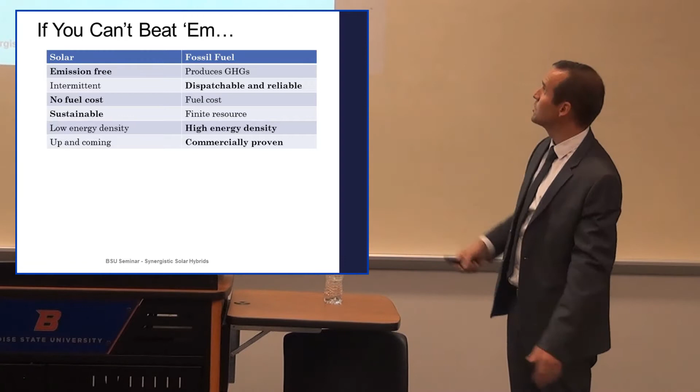So solar has no fuel cost, whereas with fossil fuels you actually have to put a lot of work into getting that fuel out of the ground and into the right state to put it into a power plant. Solar energy is sustainable, so as long as the sun is shining we're going to have this great resource, whereas fossil fuel, depending on who you talk to, one day is going to run out. It might be several hundred years from now, but one day we're going to have to get off of fossil fuel. Solar's big disadvantage is it has a really low energy density, so despite all this sunlight hitting the earth, actually harvesting it requires a whole lot of land area. Fossil fuels—it's pretty remarkable how far a gallon of gas will get you and your couple-ton vehicle.

Solar is kind of an up-and-coming technology. We still haven't worked out all the kinks and bugs with the best way to get it on the grid. At small scale it's okay because it doesn't have that big of an impact, but when you start thinking about really high penetrations of solar and wind, we don't have the technology or the controls figured out to make this whole system operate in a robust way. That's what I consider to be a very important area of research.

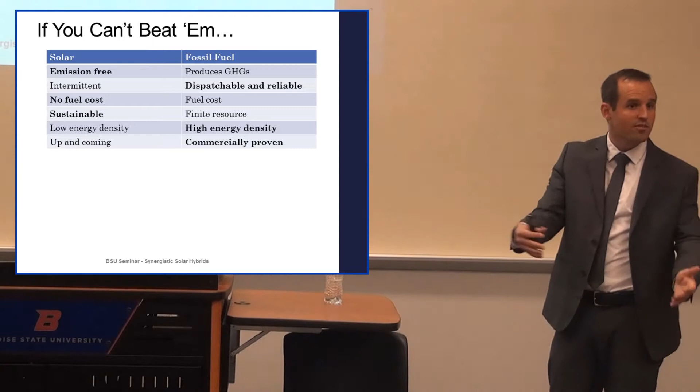My research focuses on trying to forecast what's coming in the future and use that to inform how I run my system for the next several hours or several days so that it stays reliable and efficient. Whereas fossil fuels are definitely commercially proven—we've been relying on them for over 100 years now in pretty complex ways.

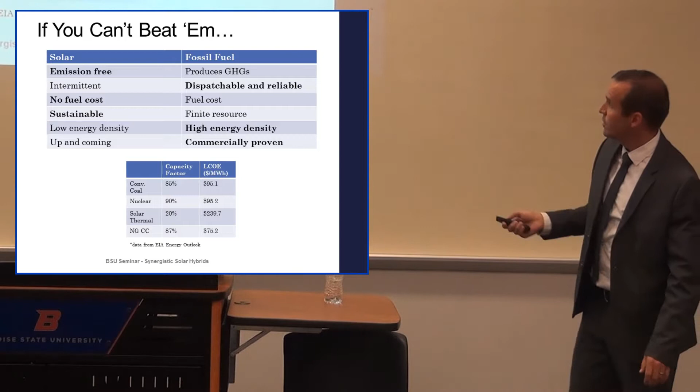I'm showing here some data from the EIA, the Energy Information Administration. This is their energy outlook—I think it's now a couple of years old—but they're showing several different electricity producing technologies: conventional coal, nuclear, solar thermal, and natural gas combined cycle.

They have more than this, but I picked and chose the ones I wanted to highlight. This is their capacity factor—basically, you build a plant to produce 100 megawatts, what percentage of that over time do you actually produce? Solar thermal is only at 20% because even though you build a plant that produces 100 megawatts, you may only average 20 megawatts, since at nighttime or if there's clouds, you don't produce anything. So that capacity factor is a big issue.

This other metric is the levelized cost of electricity. This is a term that lumps all the different costs associated with producing electricity into one number. It takes into account the capital costs of the plant—so while solar energy may be free, you still have to make a big investment to put those panels on your roof or build a power plant to harvest solar energy. It takes into account all those costs and annualizes them, plus fuel cost and the cost to pay people to run your power plant.

You'll notice solar thermal definitely sticks out like a sore thumb compared to these other dispatchable technologies—technologies where you can just start a reaction or burn a fuel and it's available on demand. The LCOE for solar thermal is $240 per megawatt hour. So as much as you might love solar, you probably don't want to pay that much to turn on your TV or lights. You'd much rather pay the natural gas combined cycle cost of $75.

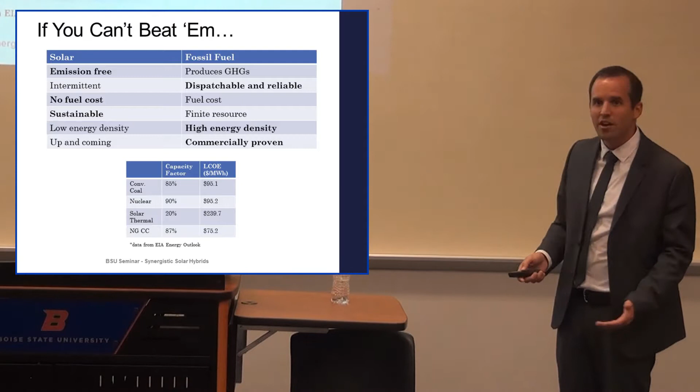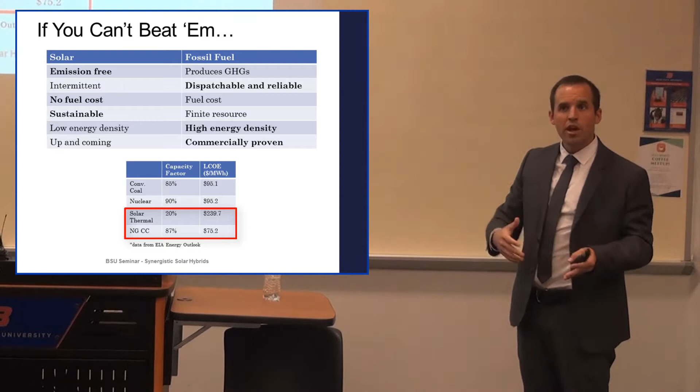So the objective of this research, and one of the central hypotheses of what I'm trying to do, is: if we combined these two and tried to pick and choose some of the benefits of each, merging them in a way that's smart from a design point of view, and operating the plant in a way that's smart from an operational point of view, we hope to drive down the cost of solar thermal power so it's much more like natural gas combined cycle or natural gas fired power generation. That's what's motivating this.

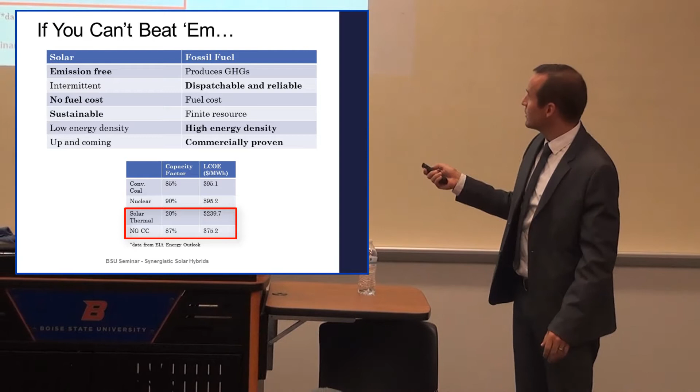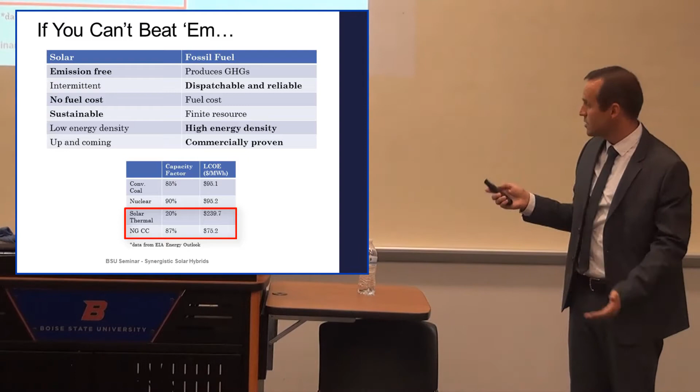We don't think we're going to get this lower than natural gas or get a higher capacity factor, but we think there's going to be some medium in between these two things where solar power might become worth it one day because it's sustainable and emission free—maybe one day it might be worth it to invest in solar thermal power without subsidies.

Okay, so some of the benefits of hybridization. One benefit of solar thermal power, period, is that it shares traits with conventional power. As I showed on that previous slide, conventional power has been around for decades, and we as engineers and scientists know how to run a power plant—we know how all that works. So solar thermal power lets you tap into really proven technology.

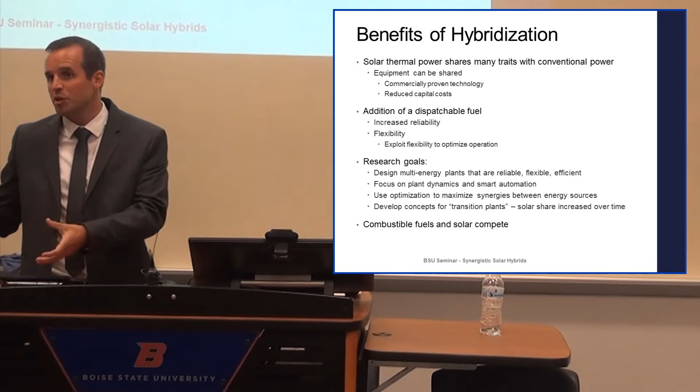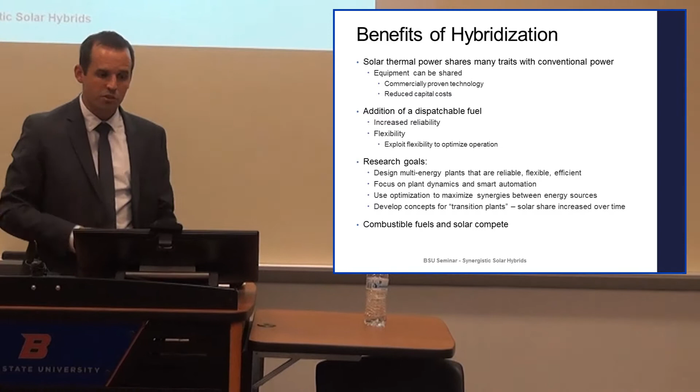You can also share equipment. You can build a plant with just a single steam turbine, or set of steam turbines, that could be run by solar or by a fossil fuel. So you get a combined reduced capital cost because those two pieces of equipment can share infrastructure. You also get the addition of a dispatchable fuel, something you're able to fire up on demand. So even though there might be some variability in the sun, you have this extra source of energy that lets you mitigate some of the issues that come with solar power.

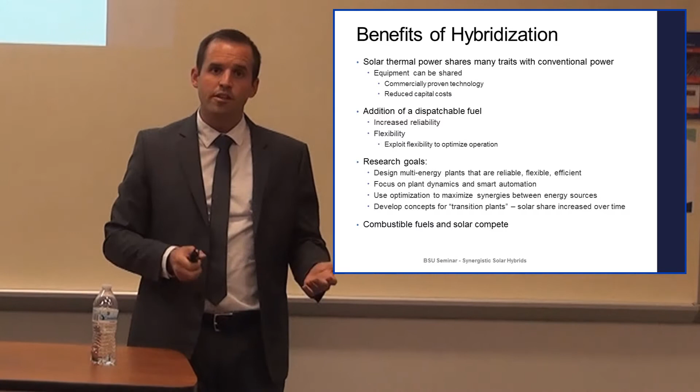This is something I'm really into: flexibility. This is becoming a pretty important term when talking about regulating the grid—can your system be flexible? In past decades, building this nationwide infrastructure relying on fossil fuels, we haven't worried as much about flexibility—we need more power, let's build another power plant, and another one. We've used this brute force approach. But now with solar and wind, we're trying to adapt so we run the system smarter—not just bigger and bigger, but smarter and smarter. So having a fossil fuel in addition to a solar power plant gives you this extra flexibility.

And in my world, when I hear the word flexibility, that means degrees of freedom. So if you've done degrees of freedom when solving systems of simultaneous equations, if you have 10 variables and 5 equations, that means you have 5 degrees of freedom.

So as an optimization person, I can take those extra 5 variables and try to find the best combination of those 5 variables that gives me some optimal result. So that's sort of very basic optimization theory.

Our research goals are to design plants that have multiple energy inputs, like solar thermal and fossil fuels, that are reliable, flexible, and efficient. My approach, especially as a controls person, is to really focus on the dynamics of the plant. So the models we develop first are called first principles models, where we're actually looking at heat transfer relations and thermodynamic relations and other physical relationships to build these dynamic models so that we know how the plant is going to operate even when it's going through a change. And that's important because we want to figure out the right automation to couple with this plant.

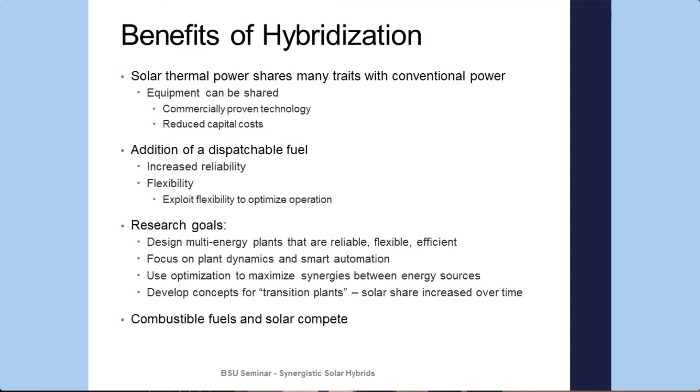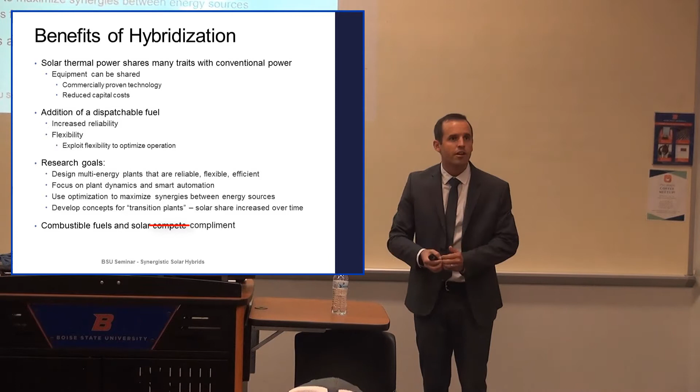We want to develop concepts for transition plants. So while we're tapping into fossil fuel technology, we ultimately want to design a plant that you can gradually add more solar energy to and make it more sustainable over the years. So a very common paradigm is that combustible fuels and solar compete, and I think that's a false dichotomy. I think they should complement each other, and I'll talk about that. Hopefully you'll get the gist of that by the time I'm done speaking today.

So there is a review paper that I wrote, and there's been some other review papers where they define levels of hybridization—combining two different types of energy into a single plant.

So what's defined as a light hybrid system would share minimal infrastructure. The assets—you can operate one almost independently of the other. Maybe the only place where they actually share infrastructure is at the grid level. So you have a solar plant over here, and then 300 miles away you have a coal-fired power plant over here. I'm abusing this term a little bit, but you could think of that as a hybrid system where the combination of those two is feeding energy into a grid, and that's what meets consumers' needs.

Obviously the system is much more complex than that, and there are people using energy in a lot of different places, and that gets really complex. But if you think of that as a hybrid, it's pretty light and a weak hybrid.

So a medium hybrid would share some major equipment. The solar component is there just to lightly supplement a fossil component. Typically this would have less than 10% of what's called a solar share, or what percentage of your energy comes from solar. So an example of this might be if you have a coal-fired power plant or a natural gas-fired power plant, you might use solar energy to preheat the feed water, and that probably wouldn't be a really critical functionality of the plant. It could probably get by without that, but you could offset some of the fuel usage by adding a little bit of heat from solar.

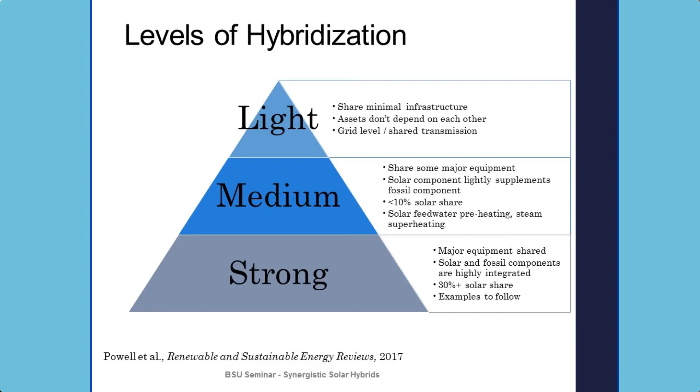And finally, strong hybrids would share major pieces of equipment. So the solar and fossil components are really tightly integrated. Typically, this would be defined as something that has a 30% or higher solar share, and I'll share some examples throughout this talk. So this is the plant.

This is my student Khalid's work. He has been working on this for a couple of years, so we're still really getting into this. I have a background in modeling the solar part of the process, and what he's done is work on modeling this whole combustion part of the process. So again, this is a dynamic model. We feed into it the total amount of solar energy you're getting, and then we have some flexibility in the system—we can ramp up and down the firing in the primary firebox.

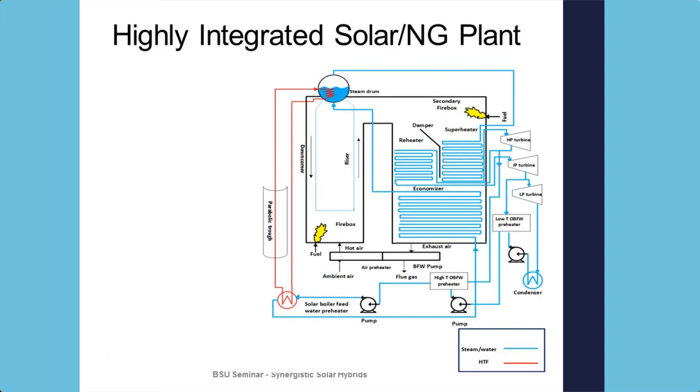So when you take that fluid, you run it into a steam drum. So you're making steam with this solar power, and then that thermal fluid, as it comes out of there, is still at a sufficient temperature where you can do some preheating with it.

So our system is designed with some special features. As I mentioned, the primary firebox is used to produce steam. When you don't have solar power, you can crank up the gas in the firebox and provide steam generation heat. One of the issues with solar power, particularly with this parabolic trough setup, is that 400 degrees Celsius really isn't all that hot, and most plants are designed to just run their cycle with 400 degrees Celsius as the maximum operating temperature.

Who's familiar with the Carnot cycle, that principle? So the efficiency... I'm glad that Christian is. Everybody raise their hand. The basic principle is your cycle will be more efficient with a higher temperature in it. So these plants by themselves tend to be on the less efficient side because the maximum temperature is 400 degrees C.

So what we've done, one of the synergies we've built into this system, is that we use this secondary firebox to boost the steam temperature. We're generating steam at a little bit below 400 degrees Celsius, and then we can fire this extra firing here in what we call the secondary firebox. That provides heat for superheating and reheating. And then we have our turbines in series here.

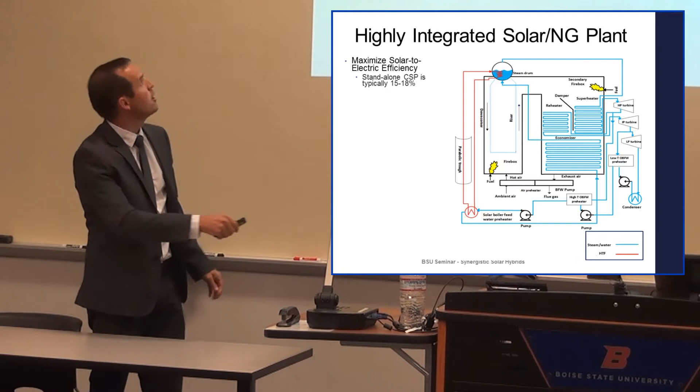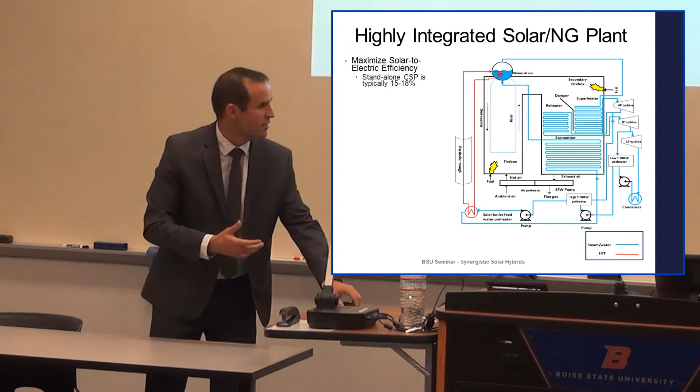This is a synergistic system, so it's not as easy to decouple those definitions. But we define something as the solar to electric efficiency, which is basically the marginal efficiency that you're getting by adding solar to a natural gas system. Its mathematical definition is: total system power minus the power produced by natural gas - we just use a nominal efficiency for natural gas, so we're not cheating there, we're using the normal natural gas power plant efficiency - and then dividing that by the total solar energy hitting your field. For a typical parabolic trough power plant, that is typically in the area of 15 to 18%.

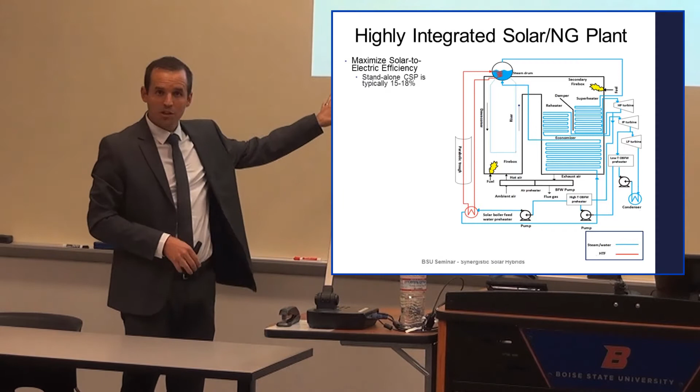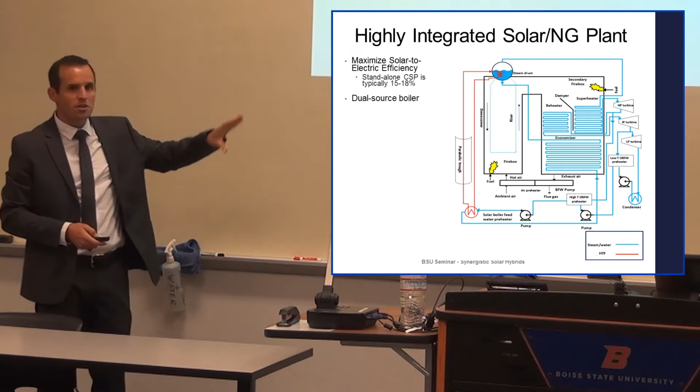So that's sort of the standard, and we're trying to beat that. But you have to think about that solar to electric efficiency as the marginal efficiency you're getting by adding solar to your system. This is a dual source boiler, which gives us some of that flexibility, those degrees of freedom that we can use to optimize. We have this solar and natural gas steam generation, so that provides some reliability to our system. We can make steam by solar or by firing natural gas.

Then this superheating thing - I mentioned the Carnot cycle - adding that natural gas lets us use a lot of solar energy, but we're still able to get a high overall cycle efficiency because we give ourselves the ability to fire up this secondary firebox and boost our steam temperature. So we've put a lot of thought into how we're recovering that heat and how we're getting our boiler feedwater up to temperature.

And then the control issues, the automation issues are very important in this type of a system, because it's not just a natural gas power plant that you can just turn on the gas and it's going to run at a pretty smooth operation. It's a plant that has to transition from solar mode during the day to natural gas mode at night.

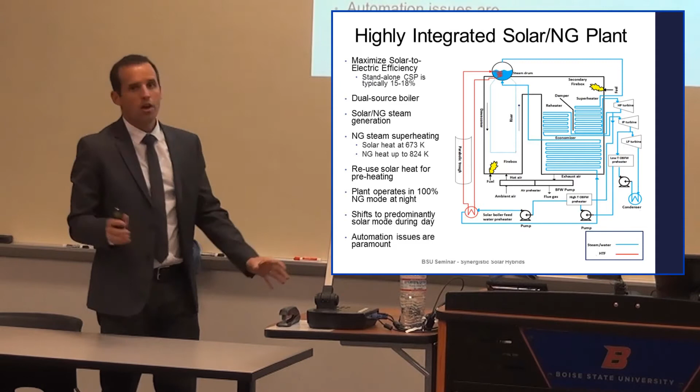So getting that whole system all working harmoniously is pretty non-trivial. This is a block diagram of what our control system looks like. I won't go too much into it, but we use the flow rate of that fluid through the solar field to control temperature, and we do a little bit of predictive control, nothing too fancy there.

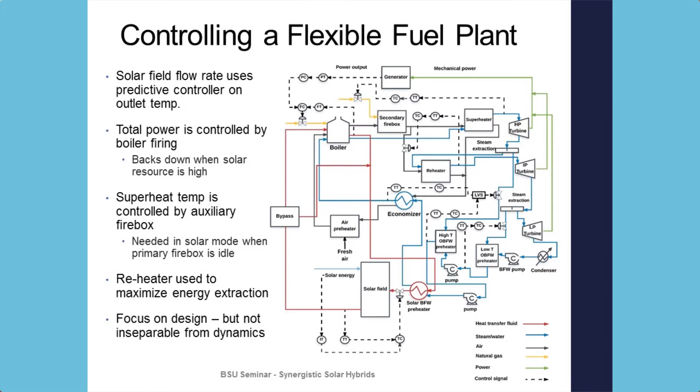Then we have our total power controlled by turning on that natural gas in the primary firebox. So when the sun comes up, that primary firing goes down to pretty close to zero. Then, when you're in solar mode, that's actually when you have to turn on that secondary firebox more, because now your heat's coming from solar, you don't have all this waste heat from natural gas to take advantage of. So this is needed primarily when you're in solar mode and that primary firebox is idle, because you no longer have that waste heat in your convective heating section, which is where the superheating and reheating are done.

So we use the reheater to maximize energy extraction. That's a pretty common thermodynamic principle.

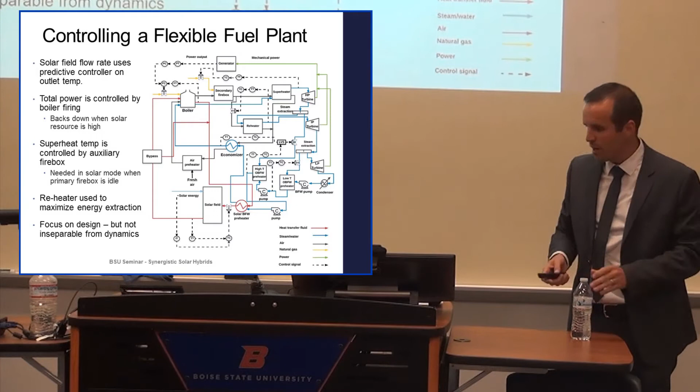And then for this study, we're focusing on the design, but our approach is to use detailed dynamic models in this system so that we're not just designing equipment, but we're trying to figure out the controls that go with it and how one component is going to change dynamically and how the other components respond to that.

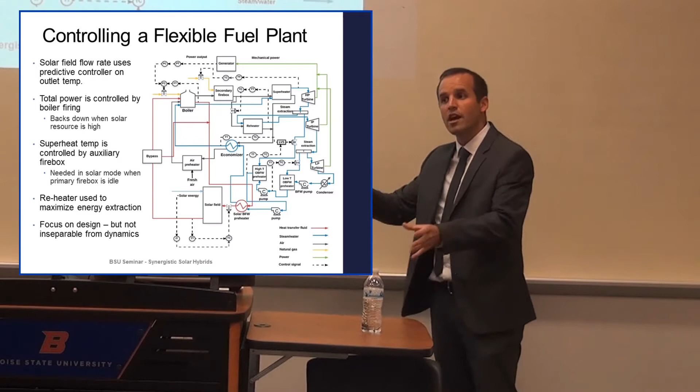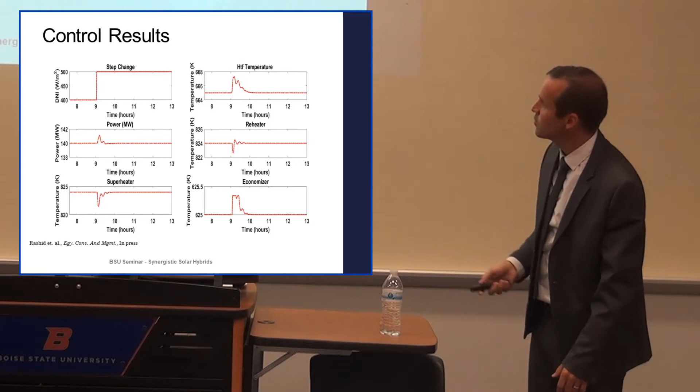But you can see our control system, while it does affect all these other things like our heat transfer fluid temperature, our total power output, our reheater and superheater temperatures, and our economizer temperature, it still brings everything back down to its set point within about half an hour, and those deviations are fairly small. These are what some of the results look like when you're actually looking at a real day, when we give this actual solar irradiance data for a day.

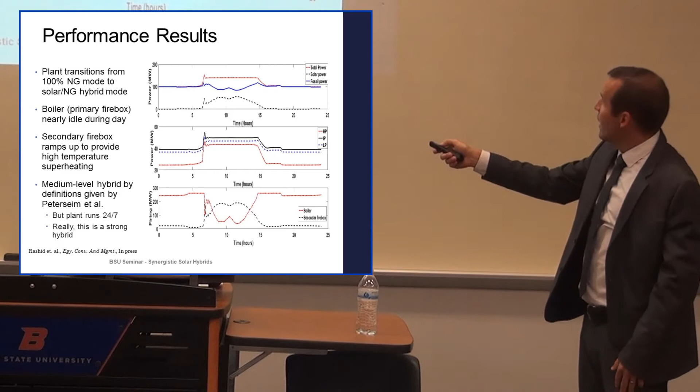I mentioned the firing. So here's the gas firing in the primary firebox and the gas firing in the secondary firebox. You can see that the primary firebox backs down when there's solar, and then the secondary firebox ramps up so it can provide that superheating and reheating heat.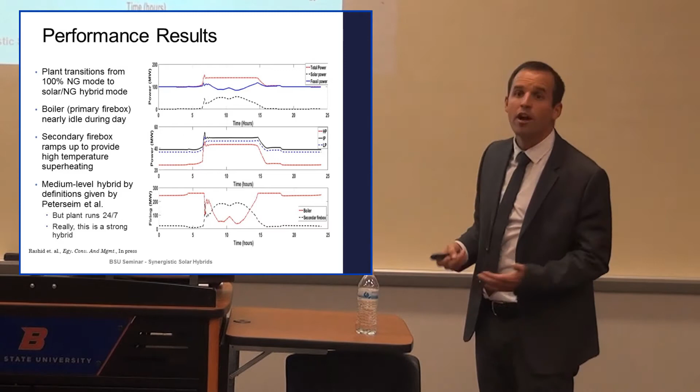So we're getting solar shares that aren't above that 30%, but this is still what I would consider to be a very strong hybrid plant because it's so tightly integrated. So these are some of the monthly performance metrics from the plant.

So we left the nitty-gritty details of the modeling out of this presentation, but if you would like more insight into the approach and what equations we use, I'd be happy to chat with you offline or in here if you have the question.

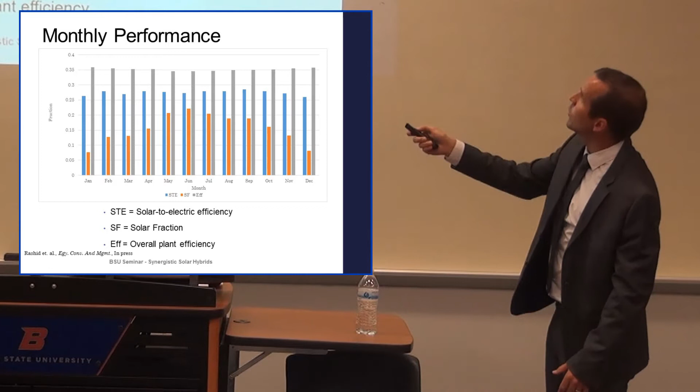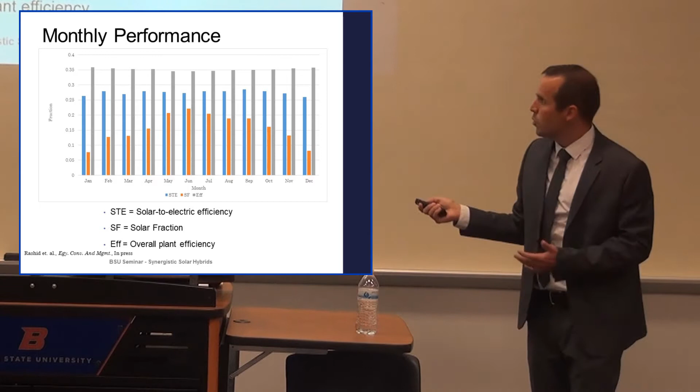So naturally, the solar fraction, which is an interchangeable term with solar share, gets a lot higher in the summer months, and in the winter months you're going to be operating more in the natural gas mode. The solar to electric efficiency is actually fairly constant, and the overall efficiency of the plant is pretty minimally impacted. The solar part actually brings down the average on overall plant efficiency. So during those summer months when you're getting solar, just because of the way we've defined the overall plant efficiency, it does take a little bit of a hit, but it is this sustainable, freely available resource once you've already made that capital investment of building a plant.

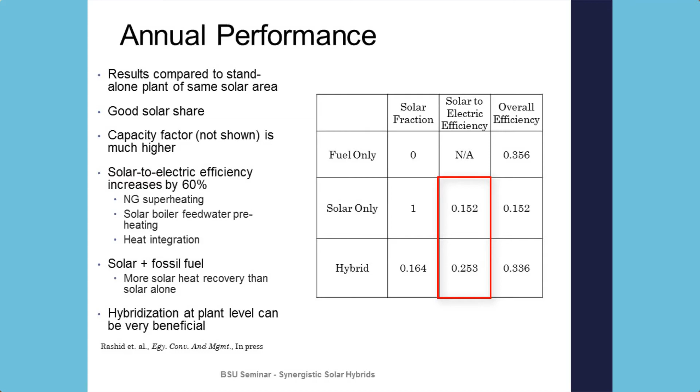So the really important takeaway from this part of the talk is that by hybridizing, by making this synergistic design, we're actually able to improve the solar to electric efficiency by 60%. If you build a solar power plant by itself, you get a solar to electric efficiency of 15%. When you hybridize, because you're taking advantage of these different synergies, you're actually improving that to about 25%. So by being willing to combine solar with fossil fuel, you're actually making the solar power plant perform better.

So this is basically what I just said. Adding solar and fossil fuel, considering them synergistic and complementary rather than competitive, you actually recover more solar heat than you would with solar power by itself. So hybridization at the plant level can be very beneficial.

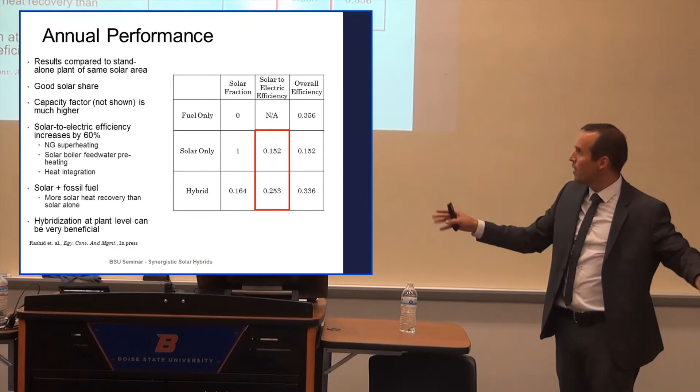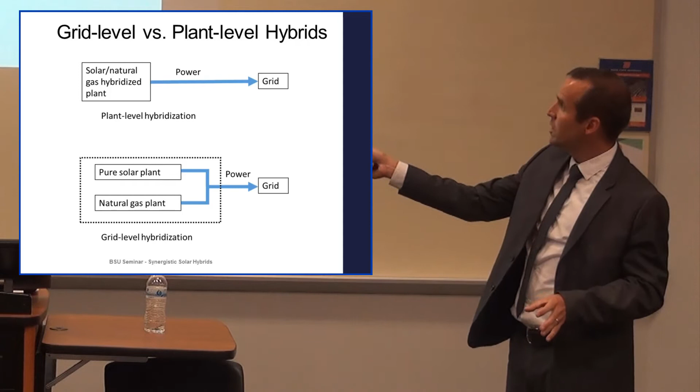So this is that strong solar hybrid, whereas at the grid level, where you just have a solar plant here and a fossil fuel plant over here, I'm going to call that a grid level power plant. So the second part of this study, which we've just submitted for publication, is a simplistic scenario where we're assuming that you want to meet some demand by either natural gas by itself, or by solar and natural gas together at the grid level, i.e. building two separate power plants, or meeting that demand with this synergistic hybridized plant.

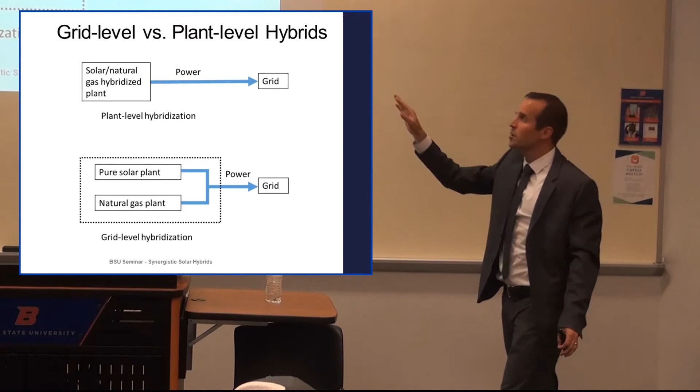So these are the definitions we've come up with for this paper: grid level hybridization versus plant level hybridization. Just keep that in mind. Plant level hybridization means this synergistic design where they're sharing a lot of equipment and are really tightly coupled together.

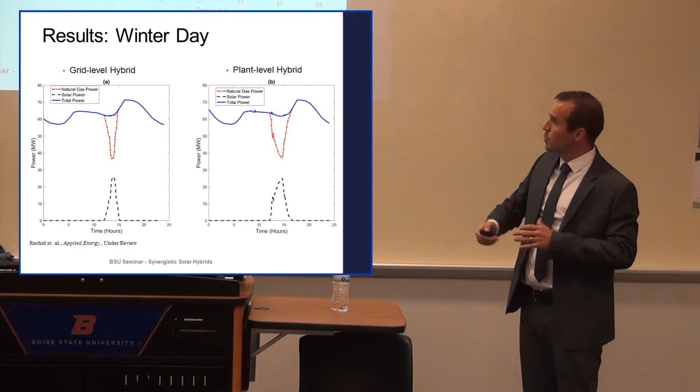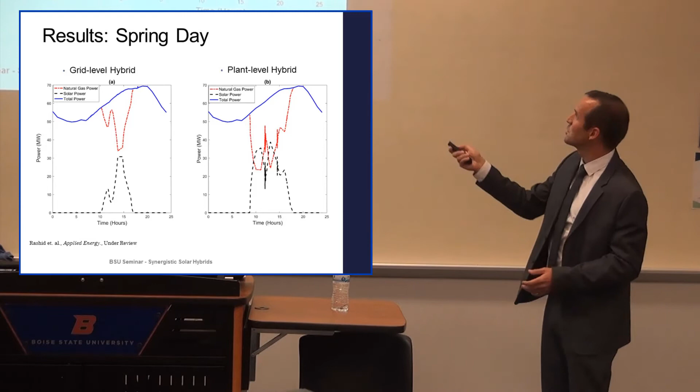When we moved to spring, I think this was a day in March that my student simulated. Same kind of thing: you produce a little bit of power here, doing some good with the solar, but here the area under this curve is a lot bigger. We're producing a lot more power from solar, which means we don't have to use nearly as much natural gas, and we can back our natural gas power plant down. One of the things we're working on is smoothing out the control here; that's kind of an issue still.

One of the questions we get asked is, what about the economics? I certainly talked about economics on my first slide. That's important - as much as I love solar power, I also love being cheap and not paying too much for electricity. So you're going to have to make this economical somehow.

So we've done an economic analysis coupled with this study, to determine whether it's better economically to hybridize or to have two standalone plants. Looking at our annualized capital costs, the natural gas plant would be about 27 million.

And again, this is per year, not the total price you pay for the plant. This is per year with a 7% interest rate over 30 years.

So to build two power plants separately would cost you nearly double that. But if you were to build a synergistic hybrid plant, you can do that for only about $10 million more per year. That's because you only have to buy one set of turbines and build one boiler, not two separate systems entirely.

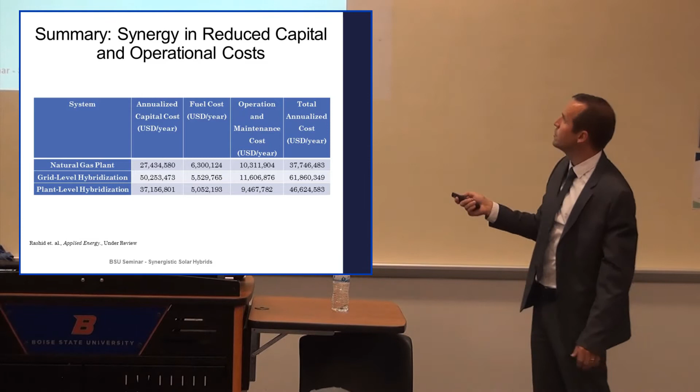Once you've lumped in fuel costs and operation and maintenance, this number includes the fuel cost. The total annualized cost to run the natural gas plant by itself is about 37 million. To do two separate power plants to meet the same demands is 62 million, and the plant-level hybridization is right in the middle, but a little closer to natural gas than to building two plants separately.

All right, the results from that on performance. Actually, let me go back. I want to point out the synergy here is in reduced capital costs. By sharing equipment, you can build a cheaper power plant relative to building a solar power plant by itself.

Now these are some of the performance metrics from this particular study. The numbers are a little different here because the scenario is different. The first results I showed were just base load power generation, but now we're doing load following with our system, so the results differ a bit but are still in the same ballpark.

So for the solar fraction, or solar share, with this grid-level hybrid system you're getting a solar share of about 12%. But when you hybridize, you boost that up to 20%. So a pretty substantial increase in how much solar energy you're getting from your plant.

The efficiency has a similar increase, going from 14.7% up to 26%. The overall efficiency of the system does decrease a little, as I mentioned, because solar brings down the average, but it's sustainable, clean solar power, so it's not really a fair comparison. We're just using the metrics that are commonly used.

So here's probably the most important number from this study: the levelized cost of electricity production. I showed you that first slide with the EIA's numbers. Ours are in that same ballpark. For a natural gas plant alone, we get $60 per megawatt hour.

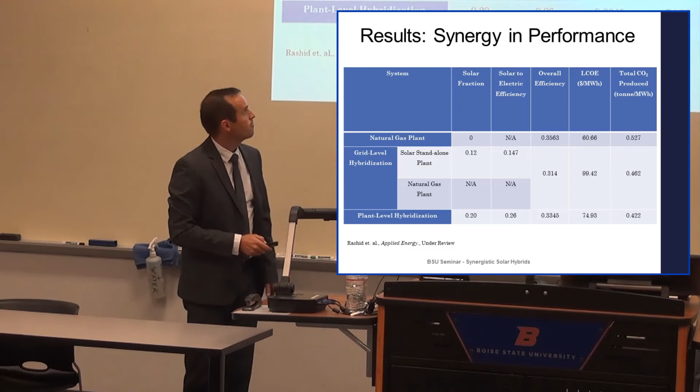We've done some sensitivity analysis to try and figure out, okay, our plant still doesn't beat natural gas by itself, so what would it take to get there? We've looked at whether increases in the natural gas price would be enough to justify this. Once fuel gets so expensive, does saving that amount of fuel make solar more competitive?

I don't know how familiar you are with natural gas prices. I think they're in the range of $3 to $4 per million BTU right now. So that break-even point, plotting LCOE here on the y-axis, isn't until about $25 per million BTU, about 10 times more expensive than natural gas currently is. So that's probably a long way off.

Natural gas price by itself probably won't justify solar power, but you can see that this plant-level hybrid does become economical a lot more quickly than solar by itself, or the grid-level hybridized plant.

Another thing we've looked at is a common policy mechanism for the federal government and other government entities: offsetting the capital cost. If you build a solar power plant, they'll subsidize some percentage of it—historically about 30%. So we're looking at what percentage of the capital cost would need to be covered.

And for the hybrid plant, that gets up to about 50%. So at about a 50% subsidy of the capital cost—just the government offsetting 50% of the solar part of the plant—it does break even with natural gas at that point, so it needs some help.

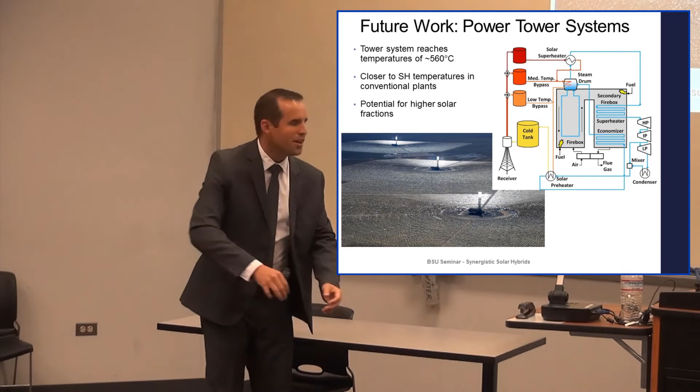So one of the things that we're working on, this is a grant I just submitted, and I'm glad it hasn't been rejected before I give this talk. But I should hear back about it sometime in September.

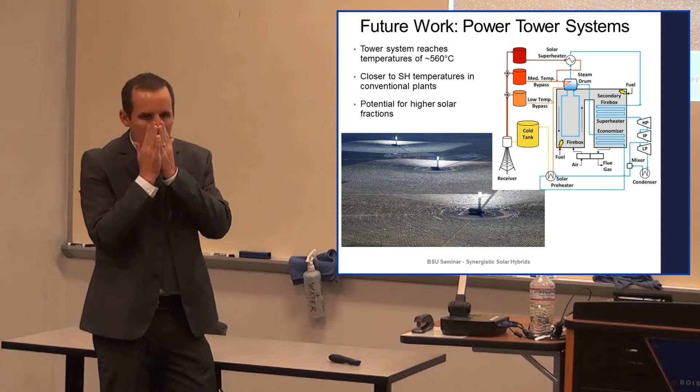This is another concept with potential to have a higher solar share because it's a power tower based system. That parabolic trough that I showed you is what's known as a linear concentrator, where you're concentrating sunlight from a wide aperture onto a line. A power tower is what's known as a point concentrator, so you're taking a huge area, like all these mirrors here, and concentrating that all onto one single focal point. Because of that higher concentration ratio, you can reach much higher temperatures.

Typically about 560 degrees Celsius is normal. Remember, for the parabolic trough plant, that was about 400 degrees Celsius. So that boost in temperature will help improve our cycle efficiency. There's a different fluid here that's able to withstand those higher temperatures.

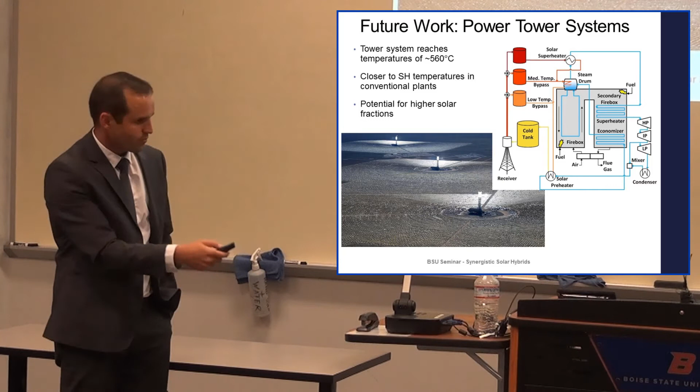So the concept that we're introducing and we'll be exploring is a plant that is adaptable. I mentioned flexibility in a plant. If you can open up more degrees of freedom and have different things to do with your plant, you can solve for the best condition by using optimization techniques.

So the flexibility that we're building into this plant, I'll get to on our next slide, but you notice we have the ability to produce heat and deliver it here to a solar superheater. So this can have a higher solar fraction because now you can do the steam superheating with solar if you have enough energy available. We still have backup superheating with natural gas. We can also do solar steam generation, but notice we've designed this plant to give us the ability to bypass the solar superheater if we need to, and I'll get to that in a moment.

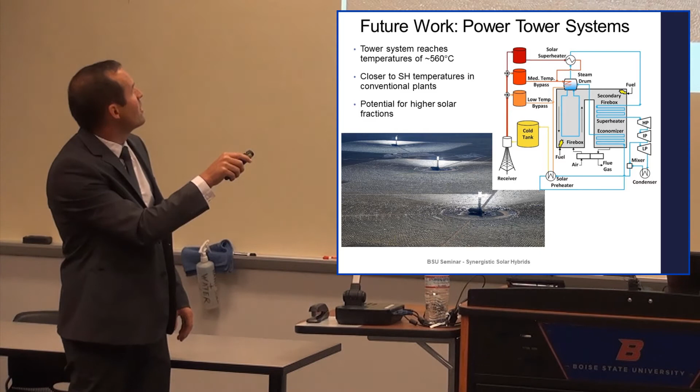And finally, we can bypass both of those entirely and do this low temperature bypass, and I'll talk about why it might be advantageous to do something like that here in a minute.

I've been doing this research, I started getting interested in concentrated solar power as a graduate student, and I had never actually seen one of these power plants until back in July. Has anyone seen this? This is real. This is very real.

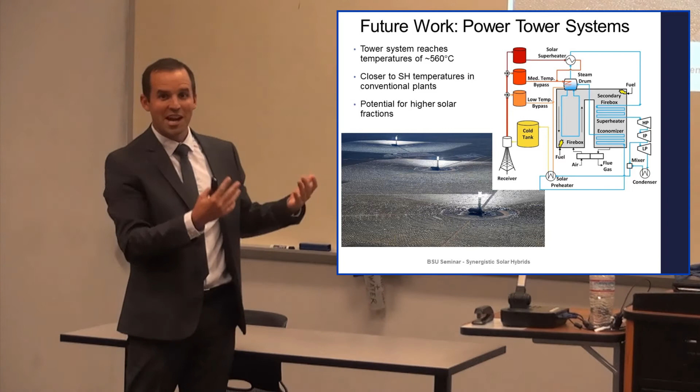So if you ever... this is actually right off of I-15, Interstate 15. If you're driving from Las Vegas to Los Angeles, you'll pass this. It's right off the side of the freeway. I'm surprised it hasn't caused more accidents because I found myself just staring at these big glowing towers. I was telling my wife, I gotta take a picture of this while we're driving through. She wasn't taking a good enough picture, so I might have been driving and taking a picture at the same time. Not really.

So one of the issues with these power plants is the way this is controlled for the parabolic trough system or for this system is the plants are built to try and reach a certain temperature. So this 560 degrees C, they treat that as a constant. So when there's not enough solar power and you still want to reach these high temperatures, what you do is you slow down the flow rate of your heat transfer fluid going through your receiver. So what that causes is when there's not much solar power, you have to turn your flow rate way down. That causes what's called stagnation.

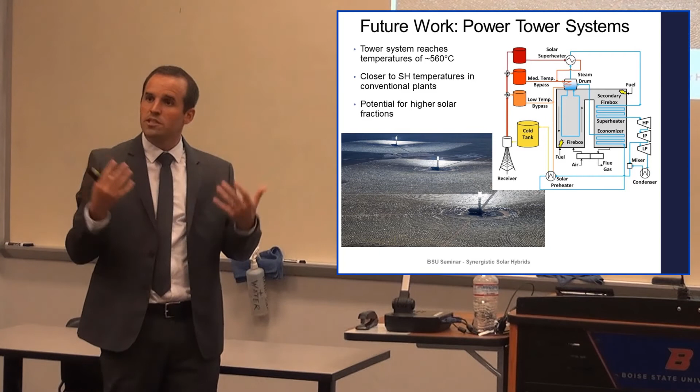So now you have this very hot tower and you're not removing a lot of the heat from it with your fluid. That causes your tower to lose heat by radiation back out to the system. So one of the things we're introducing is something called flexible heat delivery.

So we've designed our system. Here's a simplified version of it in these different scenarios. We want to design a system that lets you collect solar heat at optimal temperatures. When you have a really sunny day, you collect heat at a high temperature and run it just like it was designed to do, so you do superheating, steam generation, and preheating.

But maybe it's going to be a marginally cloudy day, or maybe mid-morning or mid-afternoon, or you're getting some clouds. You could collect heat at a lower temperature. That reduces the temperature of your tower, so you're losing less heat to the atmosphere by radiation, and you're cycling more fluid through, capturing more of that heat to deliver to your power cycle. But you can no longer reach the high temperatures required for the steam cycle, so you bypass the superheater and rely on your natural gas system to do the superheating for you. So you're going to lose a lot less heat by operating this way.

And finally, if it's winter, if it's a pretty cloudy day, you might not be able to do much more with that heat than just do the boiler feed water preheat. So this is another way of building flexibility into our system. High temperatures lead to stagnation, and we want to be able to optimally divert heat to the right place based on the conditions.

So we will consider storage in this case. You'll notice the plant has storage tanks that collect heat at these different temperatures, and think of this more as a dynamic transient problem. We want to forecast prices or solar energy availability or demand, figure out how do we run our system optimally, at what times of day we're doing this or that, so that some global objective is maximized. That might be maximizing total profit for the plant, or just getting as much solar power into your system as you can.

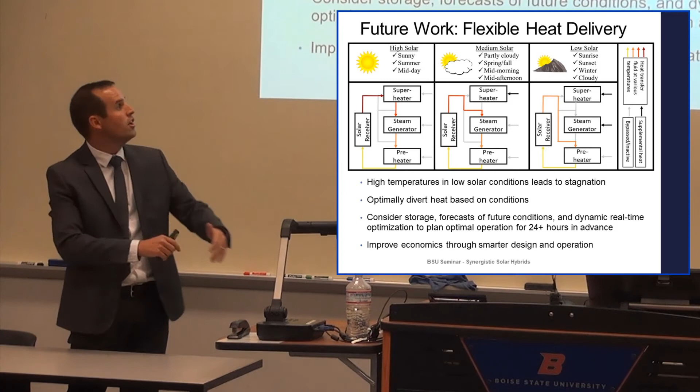Using smart models to say, okay, what are we doing now? What are we going to be doing 15 minutes from now? What will we be doing two hours from now? And have all of that solved in one single optimization problem. That gets very tricky. That's what I spend a lot of my PhD research doing, so I'm kind of chomping at the bit to solve this problem.

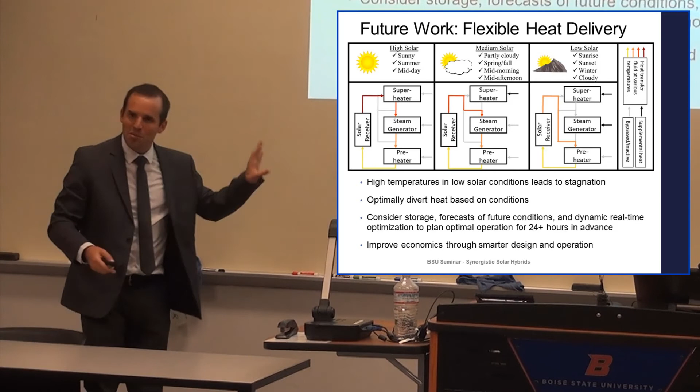So, conclusions. Synergistic designs lead to better use of solar power. I think it's not the right approach to say we want to switch over to 100% renewable power. I think it's actually smarter to design systems that use the advantages of both fuels, both energy sources, in the smartest way that's globally optimal. In this case, we use natural gas superheating to improve our cycle efficiency, and we did a lot of things with smart heat integration.

So solar and hydrocarbons can complement each other. It shouldn't be this paradigm of one versus the other. If we consider them together, we actually get a benefit that overarches the whole system and improves globally the economics and efficiency of the whole system.

So that economic study kind of told us what we thought we would see. We thought we would get numbers somewhere in between the two power plants, but we were pleased that it's closer to natural gas, a lot closer than building two systems separately. So we still need to have some dramatic CSP cost reductions. I think one of those cost reductions is going to be by optimizing the system, but we'll see how that catches on.

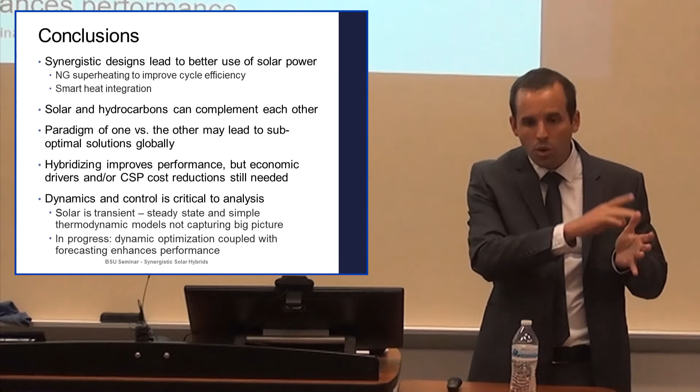So dynamics and control, because solar is so inherently transient, to me that's critical to the whole thing. Having a steady state or a simple thermodynamic model just doesn't capture everything that's happening. You have to consider what's going to happen over the whole course of a day or multiple days if you really want to capture the effects and do these calculations. That's our approach. So coming up is how do we dynamically optimize our whole system by using smarter operation. We want to be smarter, take advantage of this synergy, and use those degrees of freedom.

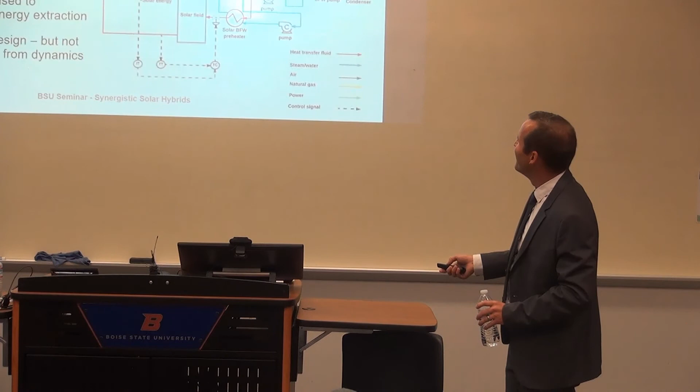Sorry, not the most efficient way of doing this, need to optimize. Yeah, unfortunately I don't know much about that stuff. Okay, so we still do preheating. Yeah, see, you're going directly into your steam drum with your solar, and in the past we've seen preheating, like where your economizer is. Yeah, okay, so preheat that fluid with the solar before it goes into the steam drum. I'm just curious why, is there a reason you got away from that?

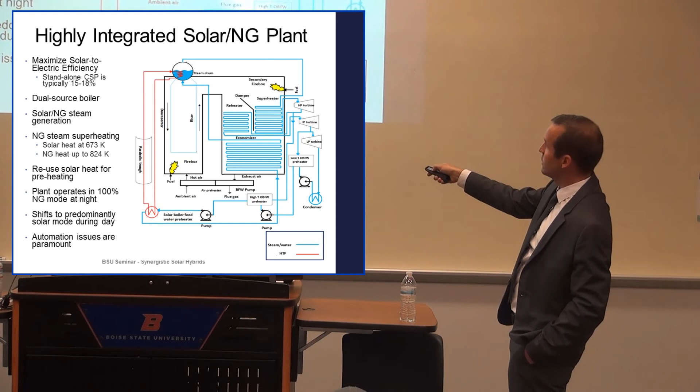So that's what's happening here, the solar boiler feed water preheater. It comes to the solar preheater first, and then it goes up to the economizer. Okay, so we're still doing that, it's part of the system. Okay, I missed that. Yeah, this is... I struggle to work my way through it sometimes.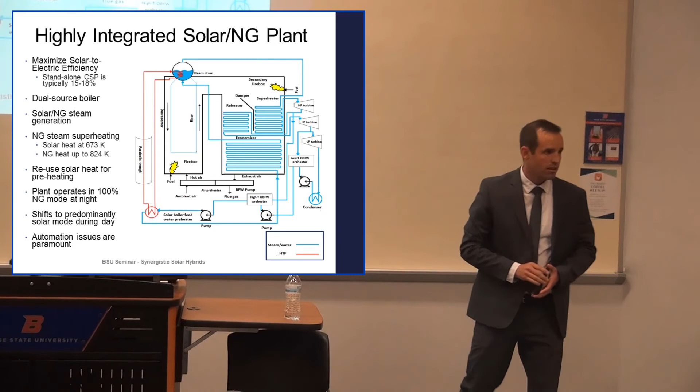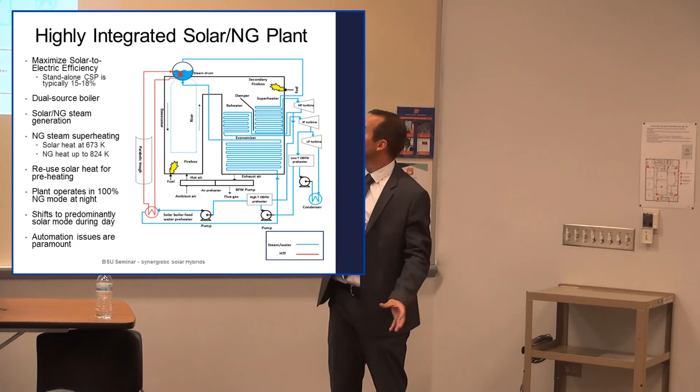Cody, on this, you said you're using Simulink, does that also include the thermodynamics, so changing the input temperature in the solar changes a bunch of other parameters? Is that already modules you developed? Everything is based on models we've developed, and it's all in Simulink. However, on the thermodynamic cycle we've cheated a little bit, since these have much faster response times. So we use steady state models and pretty much have lookup tables to look up steam properties, but this is done live and dynamically. We are kind of ignoring the dynamics of the turbines.

Other questions? Yes, I have a question about the efficiency increase of solar production. Is that coming from the efficiency loss of natural gas that transfers to the solar? So I think you're asking where does the efficiency gain come from? Okay, so relative to a normal solar power plant, you would actually have that heat transfer fluid first do superheating, then steam generation, then preheating. Because you're limited to 400 degrees Celsius, you just have a lower cycle efficiency. But we've sort of skipped that superheater and go straight to steam generation, relying on natural gas. So it's taking advantage of the higher temperatures that combustion of natural gas can provide to improve our overall cycle efficiency.

So you were talking about how you get more efficiency adding solar to this, but solar takes up a much larger square footage footprint compared to a natural gas plant or something. So they'll most likely have to be in a large flat area, which is probably far away from the city. Have you looked at how much efficiency you're losing just getting that energy to the city? Even in places like Japan where mileage is very costly?

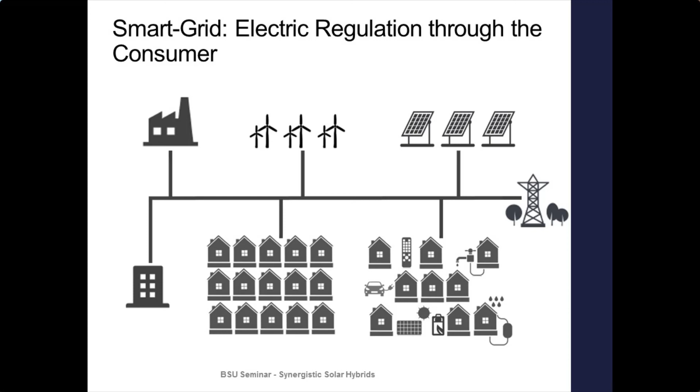My other research is, there's a lot of different system configurations you can look at. This is kind of a big picture project where we wanted to ultimately look at a whole grid level and how all this operates. This particular slide is made for a concept we're working on where we're using live price profile signals to try and incentivize homeowners to store energy and help the grid. There's lots of different combinations of this stuff, and this is one particular one we're looking at.

We did look at, one of those first papers I referenced was a review paper we wrote hybridizing different fuel sources with solar thermal energy, and I'm sure you could find several review papers on wind or nuclear. So we looked at hybrids of wind with solar thermal, nuclear with solar thermal, coal and natural gas with solar thermal, but that's just the scope of what we're working on right now.

So in this model, this group of neighborhood people need to sign up for a particular thing. Otherwise...

Yeah, this is something we're just playing around with right now. My student who just spoke at the EPI conference a couple hours ago is working on smarter home automation so that homeowners can respond to price signals from the grid. So ultimately, the big picture is, what if large concentrations of people are doing this? Then the grid could actually use that price signal as a regulatory mechanism, where if they're expecting a lot of solar and they need people to use it, they could send a lower price signal to encourage people to charge batteries or pre-cool their homes or something. So that's the bigger picture we're looking at on this project.

But this one's a hard one to get our mind wrapped around. We're still just scratching the surface there. Yes, one more for me.